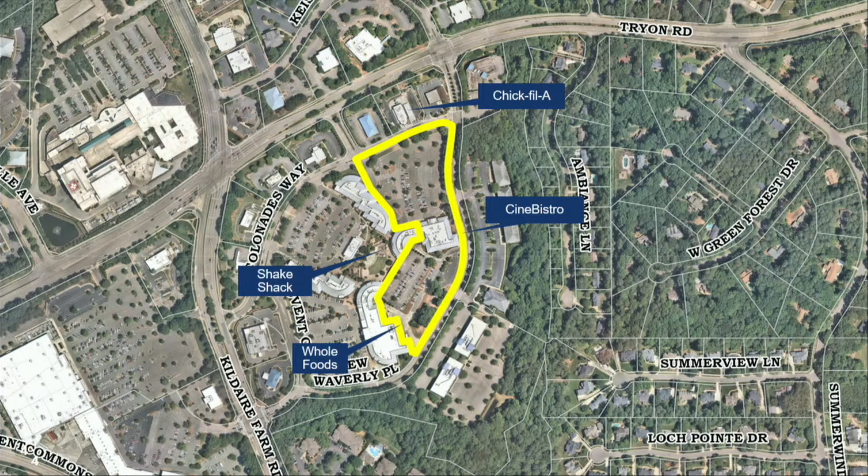The current zoning is general commercial conditional use, and the applicant is proposing to rezone to the mixed-use district, or MXD.

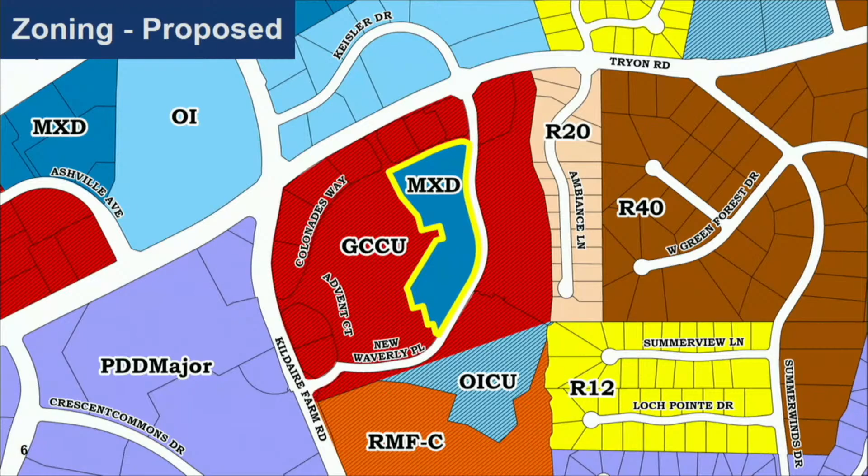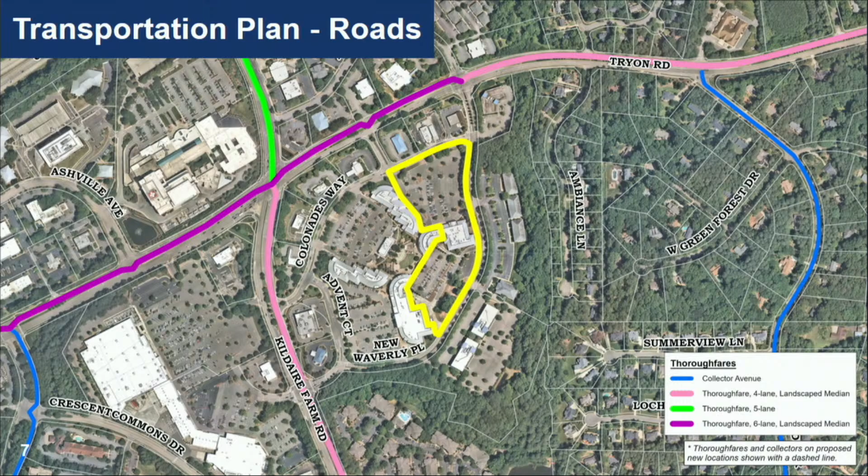According to the future roadway widths map, the site is located on local private roads within a shopping center. Nearby thoroughfares include Tryon Road and Kildaire Farm Road, both built to their ultimate cross-section. The site is served by nearby Go Cary fixed routes as well as Go Triangle transit routes.

The Parks, Recreation, Cultural Resources Master Plan does not include any proposed greenway corridors within or adjacent to the site, but there are Cary greenways nearby, including the Swift Creek Greenway and the Crescent Green Greenway, about a half a mile from the site.

Cary is also in the process of updating our PRCR system plan, and you received an invitation to attend the open house, which is tomorrow, March 25th. This draft plan will look at adding both greenways and street side trails in close proximity to the site.

There are 2 parks close by, first including the Marla Dorrel Park, which is about 0.7 miles to the east of the site, and the Harold Ritter Park, which is about 0.8 miles to the southwest.

According to Cary's GIS maps, a portion of the site is impacted by stream buffers. Field determination would occur at the time of development plan review.

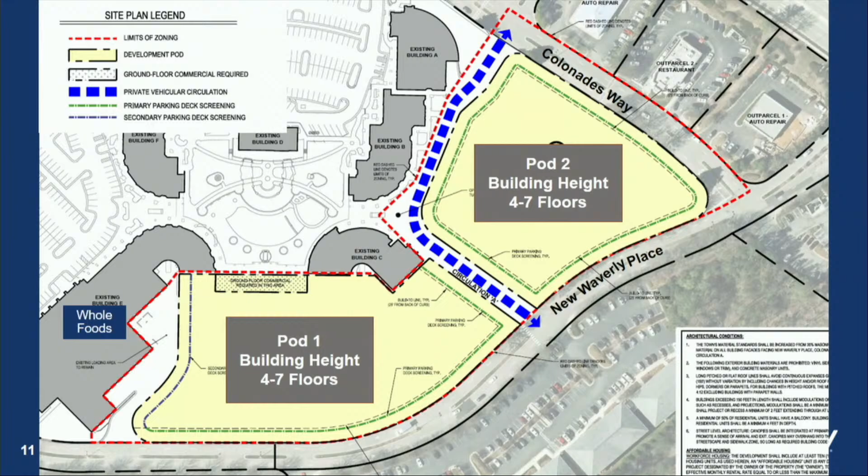The PDP includes 2 development pods, and these development pods are bisected by a roadway called Circulation A. Buildings permitted within these pods could be between 4 to 7 floors, and the development will include 2 buildings, so they will not span across Circulation A. There'll be 2 separate buildings at least.

The proposed uses include 300 to 750 multifamily units, as well as 5 to 30,000 square feet of commercial uses, which include office, brewery, retail, ABC store, just to name a few.

Since the public hearing, the applicants added 2 additional uses, amusement establishment and commercial recreation center. We note that these uses are only allowed if they occupy the existing building within Pod 1, and that's the CineBistro site, and also if the use is no more than 30,000 square feet.

So in the event that the CineBistro building is leased for one of these uses, that would occur prior to redevelopment happening.

Just to note, the current zoning on the site is general commercial. So this is just a snapshot of many of the uses that would be currently allowed by right today. For example, some of the uses allowed by right today could include a convenience store, vehicle filling station, crematorium, kennel.

With the new conditions that the applicants are proposing, they would be reducing the number of allowable uses to those shown here in white, which would include uses such as nightclub and bar, retail, neighborhood recreation, personal service establishment, brewery, theater, ABC store.

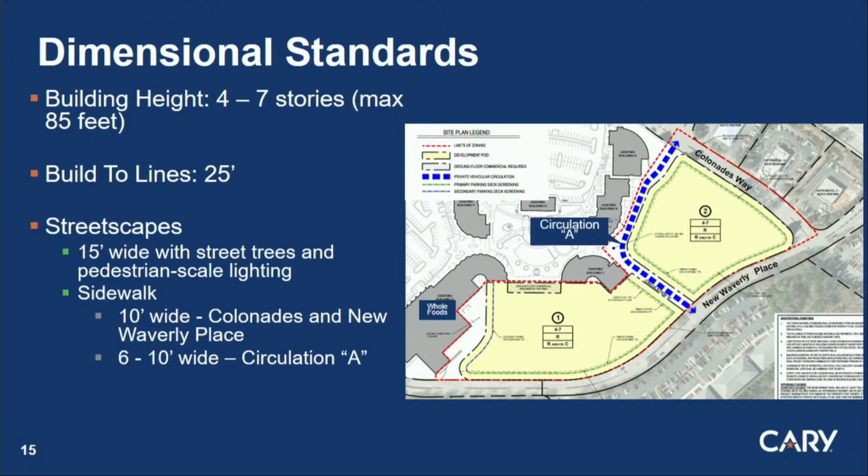There will be 15,000 square feet of community gathering area. This is roughly 3 times the required amount from the LDO of 5,000 square feet. Each community gathering area will include at least 3 amenities from a pick list, such as seating, decorative planting beds, and amenities for residents like patios.

Parking within this development would be provided within structured parking decks, with the exception of parallel parking. The PDP would also allow for some temporary on-street parallel parking associated with construction along New Waverly Place.

To ensure that structured parking is appropriately screened, the applicants have proposed a diagram indicating primary and secondary parking deck screening. Primary parking deck screening would be at a higher standard, and the applicants have committed that the decks would be screened with buildings, or designed to mimic a building with the architectural style of a building. That would be for parking decks fronting Colonades Way, New Waverly Place, and along Circulation A.

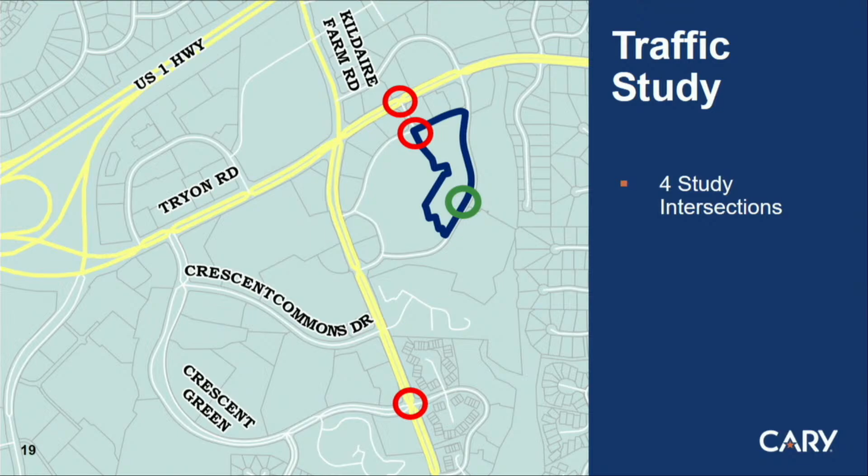The traffic study, 23 TAR 476, recommended improvements at 4 study intersections. 2 of the 4 are site access points, identified in the circles here. The applicant has offered to provide improvements at their site access on New Waverly Place, shown in green. In addition to the improvements the traffic study recommended, it also recommended the inclusion of pedestrian and bicycle-friendly facilities to enable safe and comfortable travel for bicyclists and pedestrians within the site.

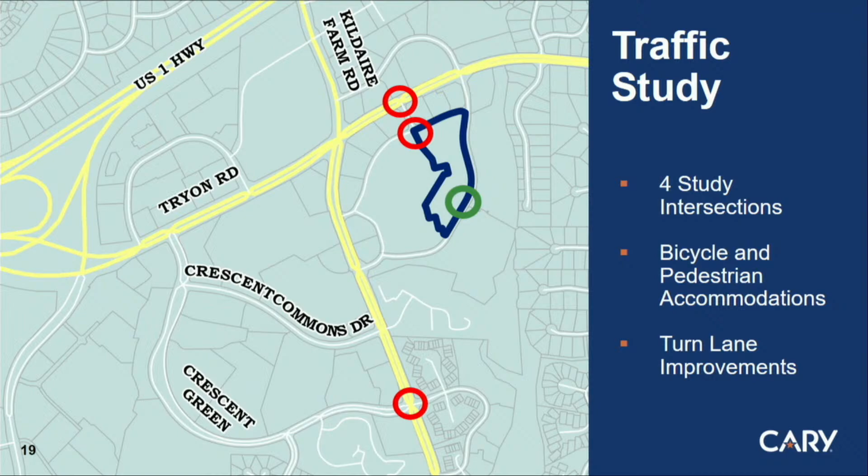Additionally, the applicant has offered 2 turn lane improvements on Tryon Road. The circulation plan proposes the addition of 10-foot wide sidewalks along the site frontage for both pods 1 and 2, and limited sidewalk improvements elsewhere on the site, but also outside of the area being rezoned.

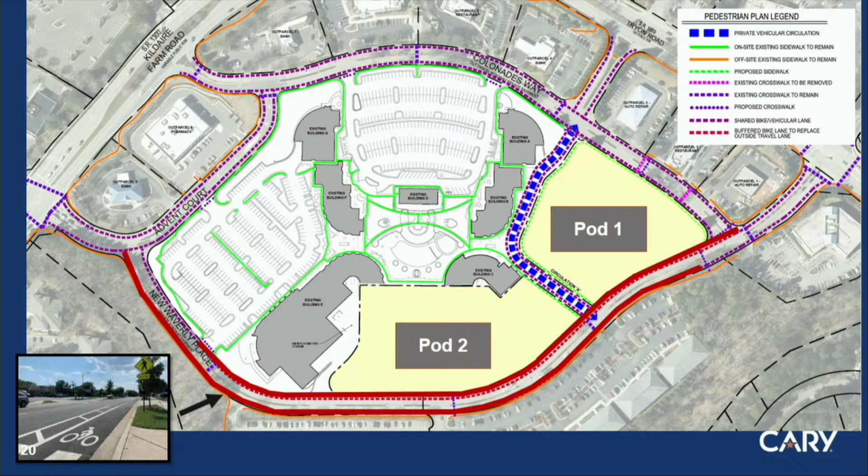The PDP also calls for the use of buffered bicycle lanes and shared bicycle lanes within the shopping center. They have conditioned these improvements, so they will require approval from the Property Owners Association before they can be installed. A third-party approval would be needed for the bicycle improvements to be installed on the site.

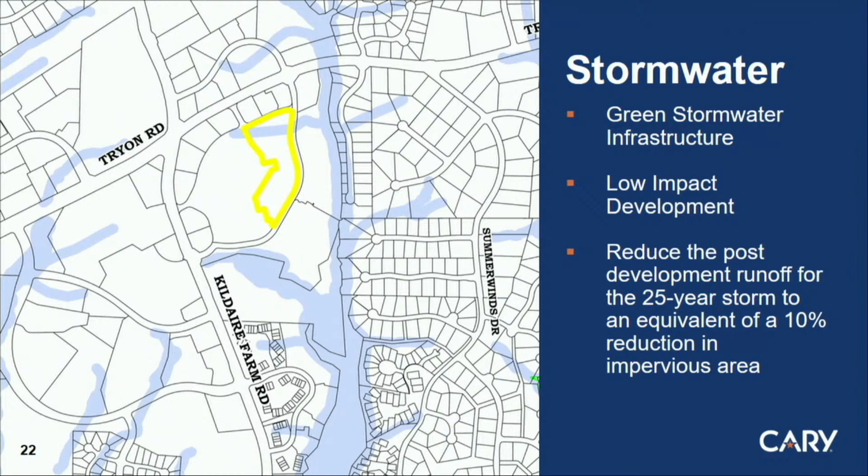The existing Waverly development was built prior to Cary's current stormwater regulations, and concerns have been shared by nearby residents over impacts to streams and lakes downstream. In response, the applicant has proposed a zoning condition to reduce stormwater impacts downstream through a commitment to use green stormwater infrastructure and low-impact development. Specifically, the condition will reduce the post-development runoff for the 25-year storm to an equivalent of a 10% reduction in impervious area.

The PDP proposes to set aside 10 workforce housing units for those earning 80% of the area median income for a period of 20 years, and also limiting 10% of the units to no more than 750 square feet, referring to heated floor area.

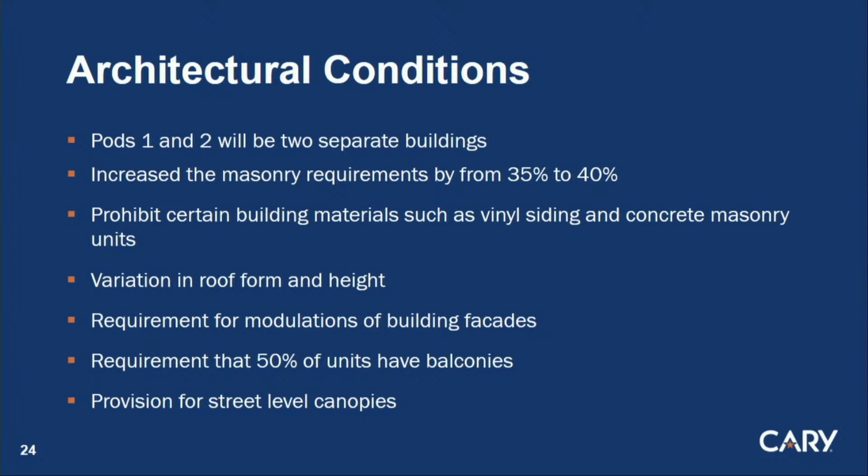Architectural conditions include committing that pods 1 and 2 will be at least 2 separate buildings, which will help with massing considerations for the site. Increasing the masonry requirements from 35% to 40%, prohibiting certain building materials such as vinyl siding and concrete masonry units, committing to a variation in roof form and height, requiring modulations of building facades, requiring that 50% of units have balconies, and providing street-level canopies.

Since this case is a mixed-use district, they have the ability to ask for modifications from Cary's land development ordinance, and the applicants have asked for a total of 5. First, they're requesting a modification to allow for vehicular gates for residential parking spaces. They're also requesting that on-street parking count for the minimum parking requirements. Under streetscapes, they're asking for 2 modifications.

First, to be able to grade and replant within streetscapes. They're also proposing a custom planting rate, detailed in the PDP. Lastly, they're proposing the removal of 2 champion trees, but propose to plant replacement trees in accordance with the land development ordinance provisions.

A public hearing was held in June of 2024, with significant participation and comments, citizens sharing concerns regarding traffic, building height, stormwater, affordable housing, and bicycle and pedestrian improvements, specifically near the nearby hospital. Following the public hearing, there have been continuous and numerous emails and calls from citizens regarding the case.

Following the public hearing, the applicants have made the following changes: they've updated the stormwater condition, and they've also noted that the buffered and shared bicycle lanes would be installed with the approval of the Property Owners Association at the shopping center.

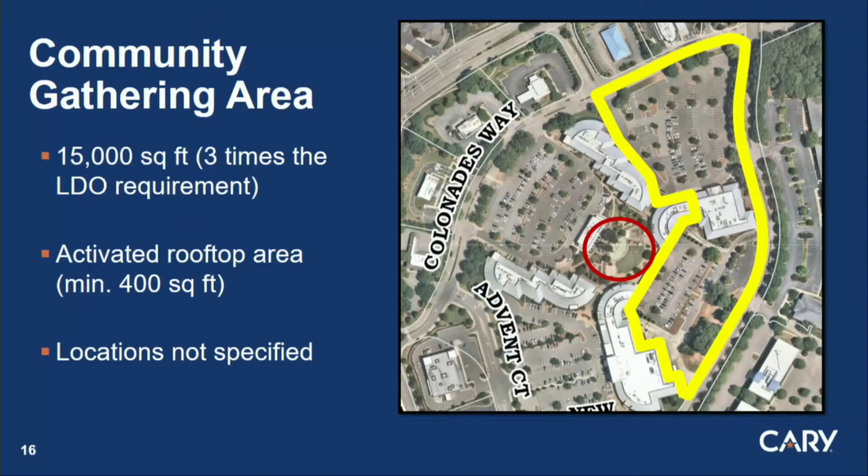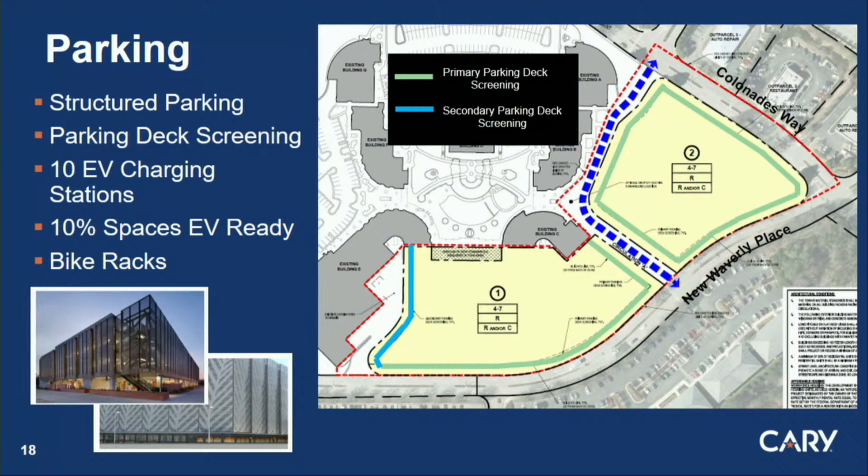I think that's all I've got for now. Oh, no, I did have one more. The building, can you go to the slide that had the parking deck screening? Now, the pictures at the bottom left, was that primary or secondary? Secondary. Okay, that's what I thought, I just want to make sure. Okay, I'm good. Mike, you have any additional questions?

Yeah, just some additional elaboration on amusement establishment and commercial recreation. Could you provide the board with a couple other examples of those types of businesses? To give some examples of what amusement establishment would be, generally a location where you can come indoors and play games. Maybe examples could be like a trampoline park or someplace with arcades inside, generally those types of uses.

We originally had that as just an outright condition, but because it's in the New Waverly Place and Colonnades Way, portions of those are in the common area where other owners have rights. Today, Heinz controls the majority of those rights, so if the development went forward today, that wouldn't be an issue. But if, for example, one of the portions was sold to someone else, they'd have to make sure they get their consent, and that's all we had to provide for. Okay, that's not the plan. The plan is to develop as soon as we can get the markets figured out. Thank you.

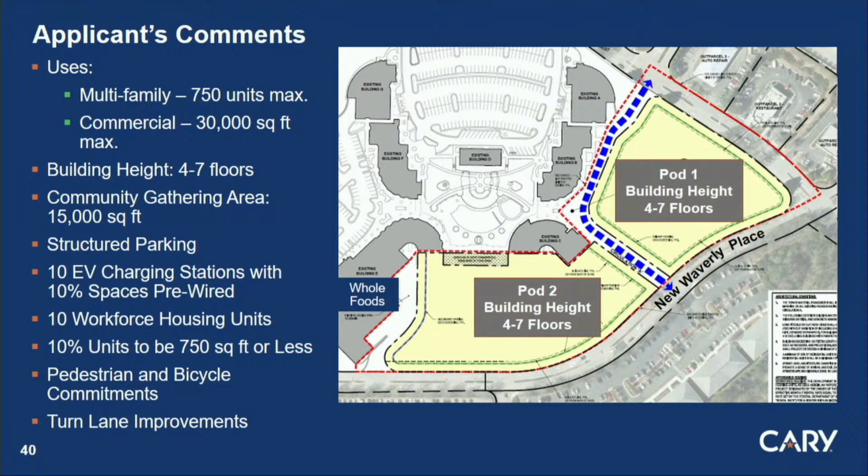There are a couple of places. Do we have the exhibit? Should I just scan through? I don't know which way it is. I can locate that. There's some crosswalks committed to. We are committed to doing the bike lanes along New Waverly Place for the entire length from Advent Court to Colonnades Way. Not just, they will be buffered bike lanes, no vertical element. Correct. Yeah, so the red lines are the extent of the bike lanes.

So this is the plan if the property owners agree? Yes, and as Jamie said, right now, Heinz is the majority owner, so they do not technically need approval. But if for some reason somebody were to redevelop and have more of the site, we're just covering our bases and not committing to something we can't do.

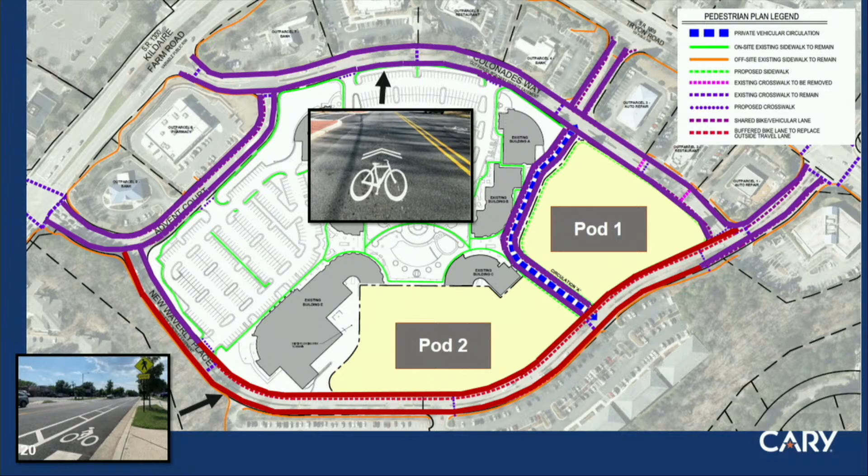This next thing I've got is not really a question, but a comment. I know access to Lochmere was a concern. It looks like there's a potential, a cul-de-sac, I think it was Summerwinds, comes closest to the back of the medical park. Might be a good place for future multi-use path connection.

There was a comparison today to Trader Joe's. There's not much parking over there, it's a very busy place. I live across the street from there. I can definitely walk and go into a store much quicker than I can park and maneuver in and out of that place. So I want to put in a big plug for the bike ped infrastructure. Let's see if that's all the bike stuff.

Yeah, I agree with you about it being a vibrant bike ped community. I think you've got a lot of use there. I've accessed the place multiple times by bicycle. It's too far to walk, but it's not too far to bike. And I think the potential, there's already a lot of use. I see kids over there on bicycles, at the intersection of Tryon and Kildaire using the signals. So it already has good connection to a lot of residential areas.

Just to say a word about the density question, I don't think there is an absolute, but I do think it serves the interest of the Cary community to increase density, for the provable fact that it does increase all business units within a certain area by having more people present.

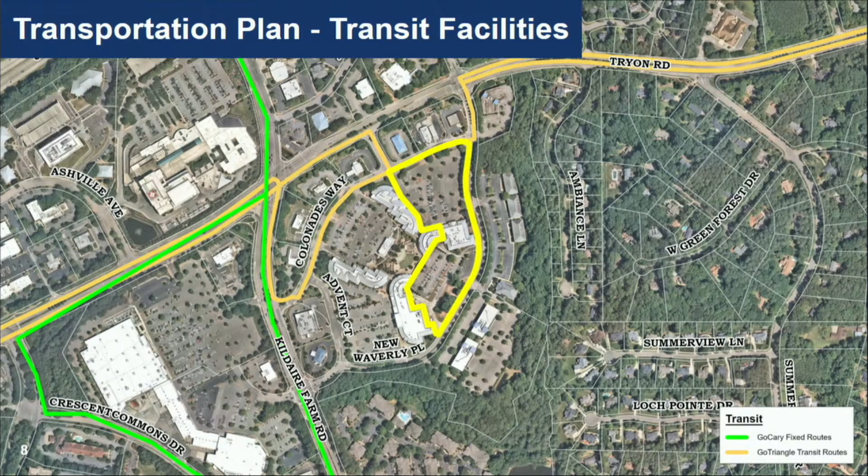As I was noting earlier, both our transit staff and regional transit staff evaluate new development frequently, and that could play into planning for future transit routes as well as transit stops. So is the developer proposing any transit stops or shelters to be built? Currently not with this proposal. Okay, all right, thank you, sir.

All right, thank you, I have a couple of questions. One, this is just my lack of understanding — what's an activated rooftop? This would be an amenity area that would be on a rooftop.

So generally, it would be an area that you can access that would be on top of one of the buildings, whether or not it's open to the public. That's what I was trying to understand - could it be a commercial use or would it be for the residents? It could be either. It's undefined at this stage in the game.

As we mentioned, a number of questions came from residents, and one I've not heard addressed is what are the evaluations to the impact for emergency services? I know there's a hospital nearby and a fire station nearby, but at what point does the density impact what we provide by way of emergency services?

Yes, we do coordinate fairly closely with emergency service providers, including our departments here with the town of Cary, but also with Wake County EMS, to provide our future land use plans as well as active development, and they are making decisions and future planning decisions based on that information.

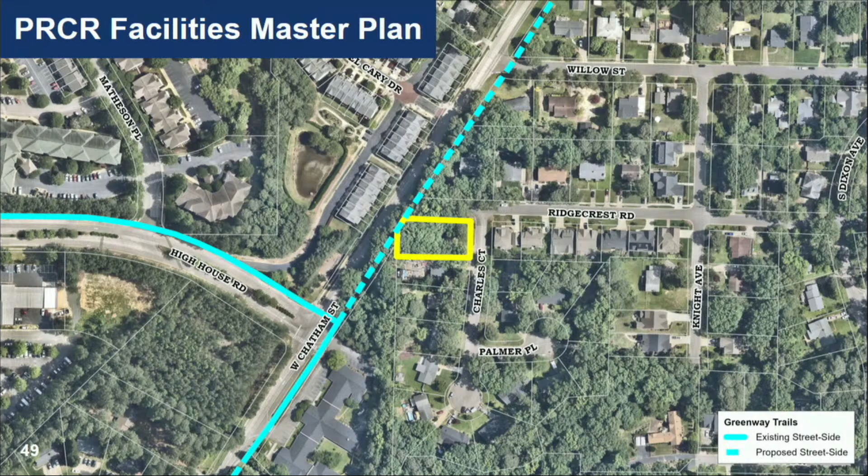Good evening, Board. This is a rezoning request for approximately .34 acres located at 402 Charles Court. The site is located at the southwest corner of Charles Court and Ridgecrest Road and abuts West Chatham Street. A detached dwelling on the property was recently demolished. According to the Parks, Recreation, and Cultural Resources Master Plan, there is a proposed street side trail on the site's West Chatham Street frontage.

Charles Court and Ridgecrest Road are both local streets. Local streets typically require sidewalks on one side. There is a sidewalk on the north side of Ridgecrest Road. West Chatham is a 3-lane thoroughfare in the vicinity of the site.

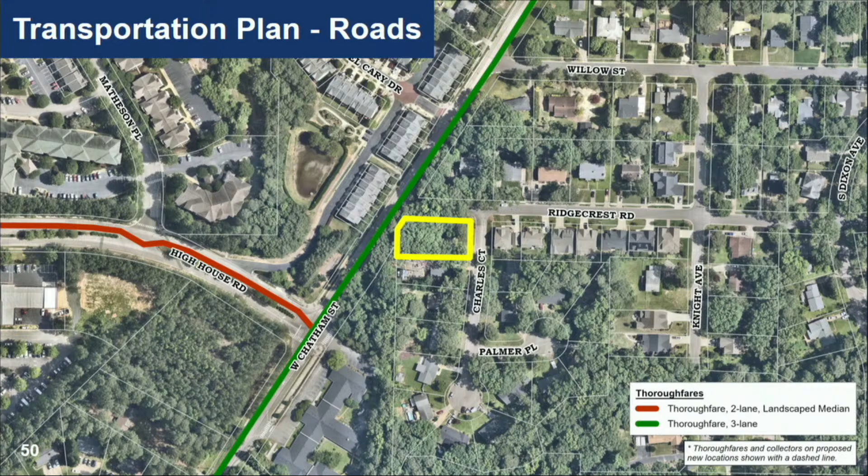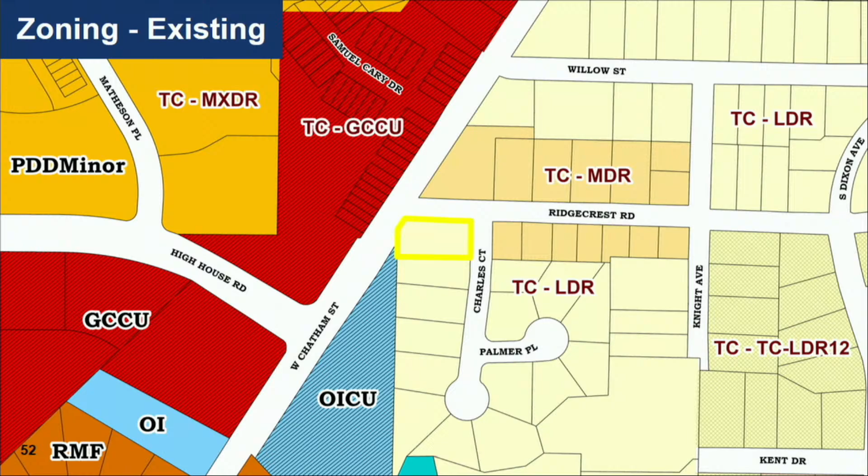Go Cary Route 4 has existing service on West Chatham Street. The existing zoning is town center, low-density residential. The proposed zoning is town center, medium-density residential conditional use. The Swift Creek Watershed Protection Overlay District will remain.

Due to the size and number of lots proposed, a subdivision exemption per NC General Statutes is anticipated. This is important because the typical site development standards of the LDO would not be required, including right-of-way dedication. However, dimensional standards of the LDO, such as minimum lot size, setbacks, and height, would still apply. In this case, only those development standards offered via zoning conditions would apply if the rezoning is approved and the site develops under this exempt provision.

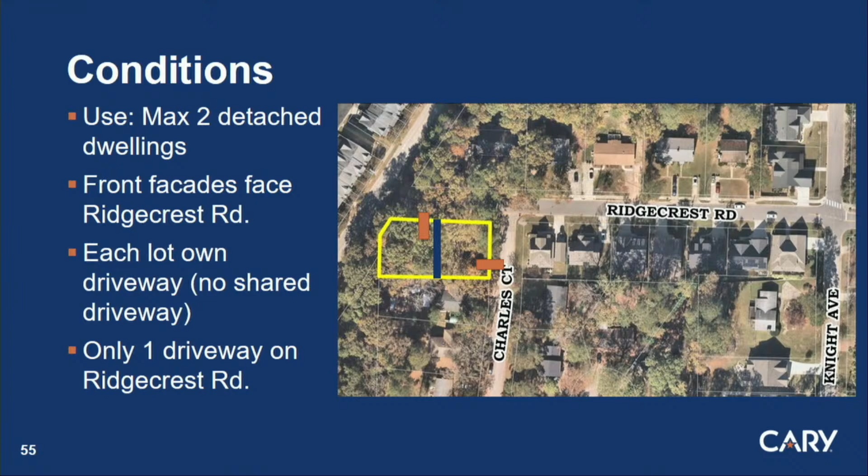Per the zoning conditions, the rezoning is limited to 2 detached dwellings. The front facades will face Ridgecrest Road. The lot split will produce lots of a similar size and orientation as the lots on the south side of Ridgecrest Road. Each lot will have its own driveway, and only one driveway may be on Ridgecrest Road, as shown in the image. The second driveway will be on Charles Court.

The applicant is also offering to dedicate 4 feet of right-of-way and easements on the West Chatham Street frontage to provide the full right-of-way per the Imagine Cary Community Plan.

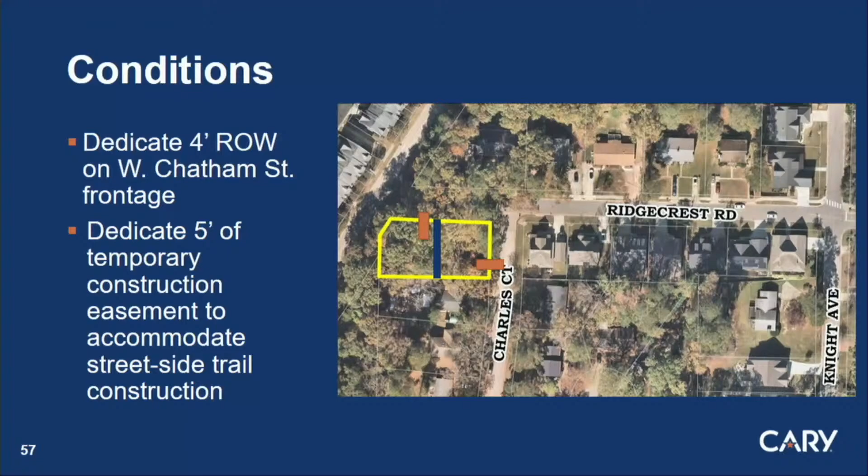Policies in the Live, Engage, Move, and Shape chapters of the Imagine Cary Community Plan apply. The Live chapter highlights the importance of maintaining neighborhood character when redevelopment occurs in existing neighborhoods. The Ridgecrest Road facade orientation commitment may help to promote a uniform development pattern and block face. In terms of the land use transitions recommended by the Shape chapter, the condition limiting the use to detached dwellings may help to ensure compatibility with the land use pattern of the neighborhood.

The commitment to dedicate right-of-way and easement on the West Chatham Street frontage may help to address Engage and Move chapter policies for multimodal street design. The condition regarding the location of driveways may help with driveway spacing considerations. No additional right-of-way is needed along the Ridgecrest Road and Charles Court frontages.

A neighborhood meeting was held in October, and 2 citizens participated. Questions and concerns expressed at the meeting include the orientation of the proposed lots and roadway access, right-of-way dedication along West Chatham, and future traffic calming measures on Ridgecrest Road. Staff received 2 emails with questions and 1 phone call with concerns regarding the type and appearance of the new homes.

A public hearing was held in February. There was 1 written comment in support of the proposal, with some additional comments regarding the need for pedestrian improvements and safety. Council members had limited comments and no questions. Since the public hearing, the applicant has made minor technical corrections to the zoning conditions.

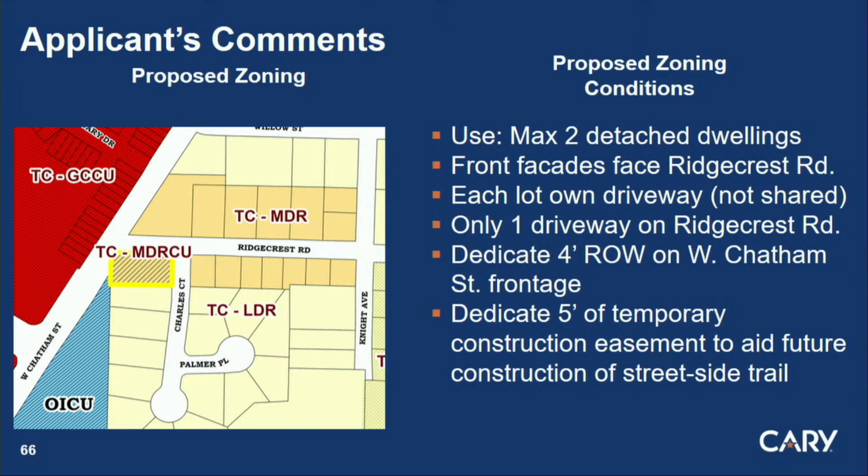Good evening, Jamie Schwedler with Parker Poe at 301 Fayetteville Street, here on another very complicated case. I'm covering for my colleague Matthew Carpenter, who's on leave with his firstborn, and I'm here to help the applicant, Chuck Smith, to get through this process.

The staff has been great once again and has resulted in a nice set of consistent conditions that really make this congruent with the rest of the neighborhood. The low-density residential to medium-density residential really is just consistent with the development that's already happening and the pattern that's already in that area, and this slide illustrates it well. The rest of the lots along Ridgecrest are already that medium-density residential, and everything else on Ridgecrest, except for the lot in question, has already gone to this format. You can see that both in the zoning itself and in the aerial, as the patterns have developed and the orientations of the driveway. Staff did a great job explaining why the driveway conditions are what they are, so we can orient one lot onto Ridgecrest and the other onto Charles and keep that consistency.

And really the only reason that this zoning is necessary is so that the property can be subdivided and meet those minimum lot size requirements, which we can't do in that lower density. And yes, it's true that that would become an exempt subdivision, but staff has worked hard to create as much certainty as they can.

I'm only seeing one section that goes into the Chatham right-of-way, so I don't understand the two different dimensions. Is that western vertical line in the Chatham? Is that where the right-of-way is, or is it just that little chopped off corner where it touches the yellow? To me it would be the diagonal corner of the parcel. It's 30 right here. Okay, yeah, okay. The second tangent is right here. This tangent is 65, and this tangent, which is going to be parallel to the street, is going to be 30. Gotcha, connecting the two points, yeah. Thank you.

Great. All right, if no other questions, is someone prepared to make a motion with regard to this case? I move the board find 24 REZ 12 is consistent with the comprehensive plan and all other applicable plans for the reasons set forth in the staff report, presentation, and discussion by the Planning and Zoning Board.

Any additional comments? Makes common sense. Second. Yep, sorry, we needed that before I asked my questions. I appreciate that, and I also recognize we don't have any additional questions. So we'll take a vote. Would all those in favor please state aye? Aye. Any opposed? All right, motion carries.